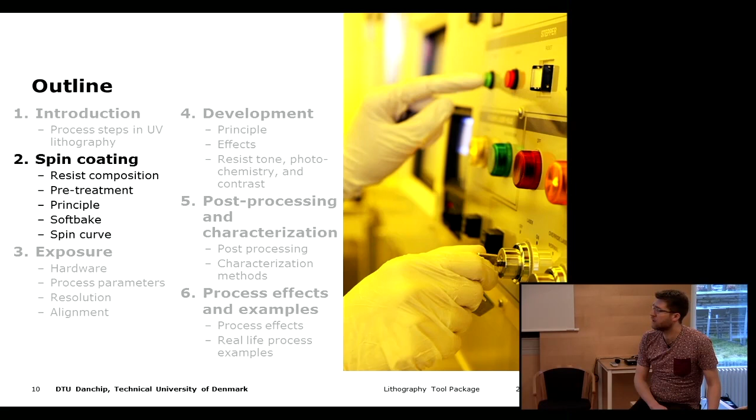So repeating again the spin coating process step-by-step, we want to go from our substrate to a substrate that has been coated with the resist film. And the way we do that is by taking the substrate here.

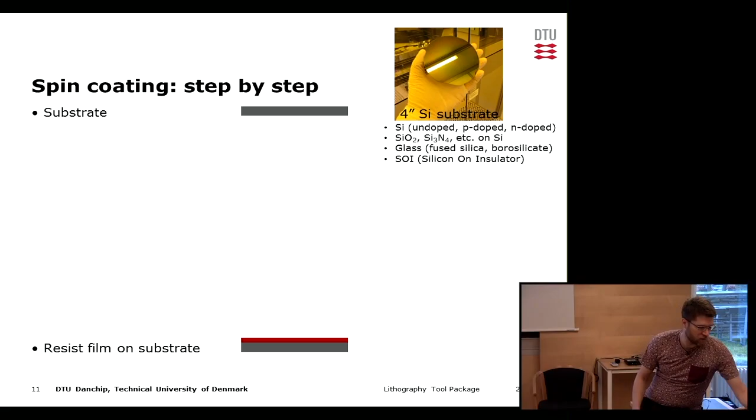Maybe I should actually send this around just in case you've never handled a substrate. I can just show you here. I have a box with some different wafers in, so that you can have a look. Should be some with resist and some with patterns on it as well.

So we start with the substrate, and then in most cases we need to do some kind of pre-treatment to the substrate before we start the coating process. We just want to make sure that the resist coats nicely and also that it adheres well to the substrate afterwards.

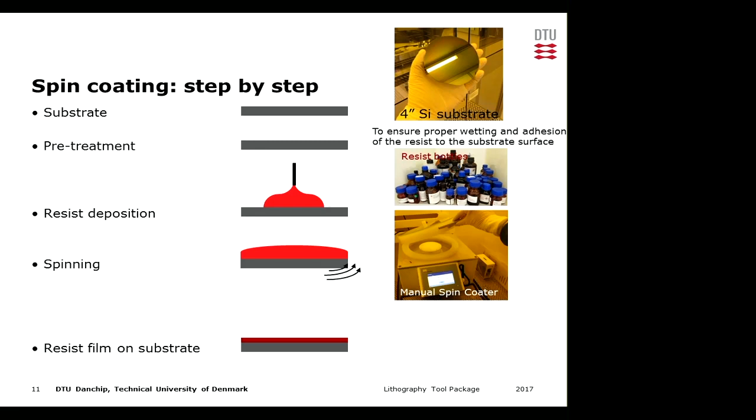And then there is deposition of the resist. So we pour some resist on top of the substrate. Then we rotate it to coat a very thin layer. And then after that, we bake it in order to get rid of the solvent in the resist. And then we are left with a dry film on the substrate. That's the idea.

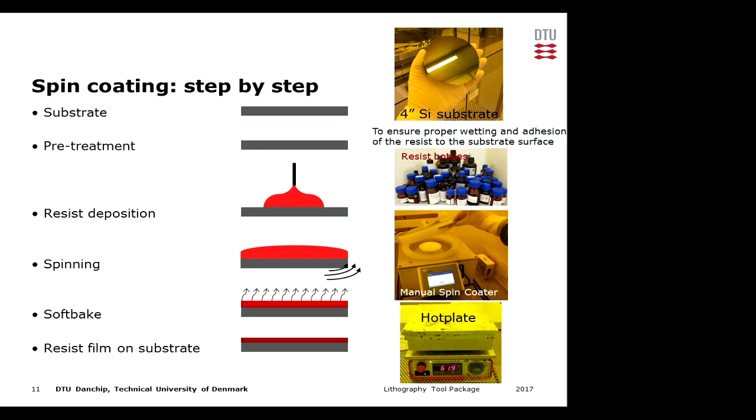So the pre-treatment before we start the coating can also be called priming or adhesion promotion. Basically what we want is to make sure that the resist flows nicely on the substrate surface, and that the resist sticks to the surface once the process is done. So we have some different types here for different substrates.

So for all the classic silicon industry ones, we use HMDS. This has a very long shelf life, so you can do it well in advance of the spin coating. Another thing we can do with the silicon is strip the native oxide of the silicon using BHF. But this has to be done immediately before spin coating, because the shelf life or lifetime of this treatment is only very short.

In some cases, HMDS is not really compatible with the resist. And then what we usually have to do is dehydrate the surface, just to make sure there's no moisture between the resist and the substrate. And this again has to be done immediately before the spin coating.

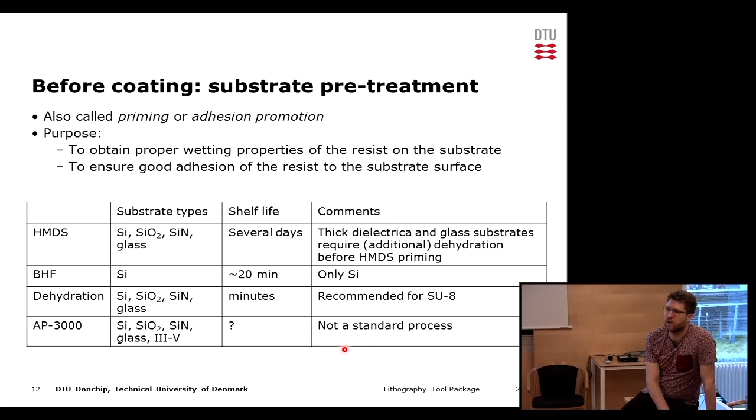So going into detail with this, the way we characterize the surface before spin coating is by the contact angle to water. What you can do to make sure the substrate is ready, or at least how we analyze or characterize the process, is by measuring the contact angle. And what we want is for the contact angle to water on the substrate to be similar to what it would be on top of the resist. This is typically in the order of 70 degrees. So that's what we are aiming for.

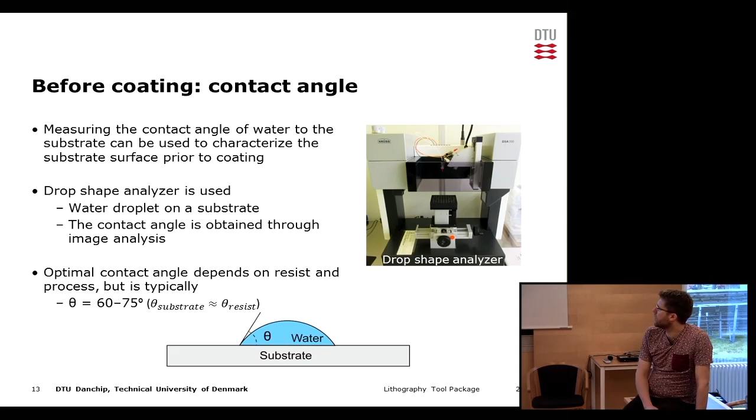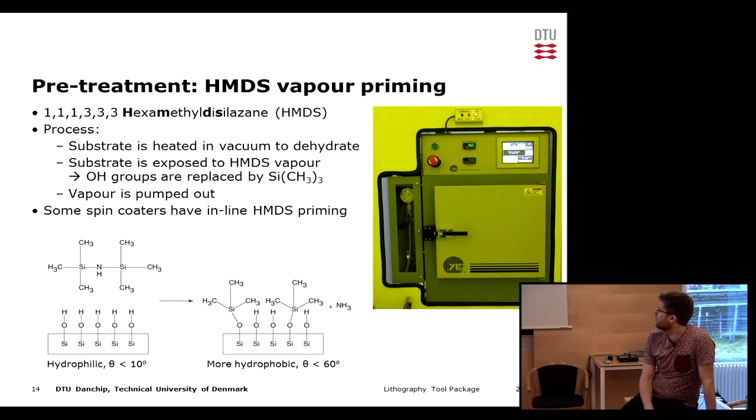So we have this silicon here, which bonds very nicely to the silicon surface, and then we have some polymer-like hydrocarbon end of the molecule there, which bonds very nicely to the polymer in the resist. So that's how that worked.

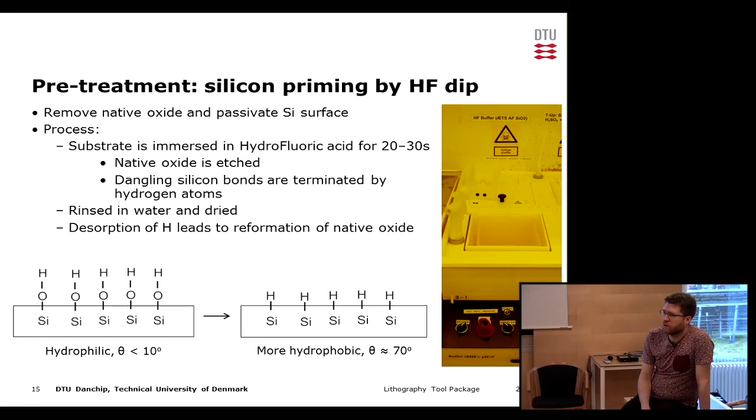Okay, but once we're happy with the pretreatment, we are ready to go on and actually coat the resist. I'm just going to talk a little bit about what the resist is made up of. It's made up of 3 components. The first one is a resin, so this is the polymer itself, and it's typically solid at room temperature.

This polymer resin is mixed with a photoactive component. This is something that we can add to the polymer, which will react to the UV light and bring about some kind of change in the resin. And this mixing is done in a solvent, which also makes the polymer fluid so that we can actually do the spin coating.

One of the things that we need for the spin coating to work, to give a specific thickness, is a specific viscosity. So the amount of solvent that we add enables us to coat the polymer at different thicknesses.

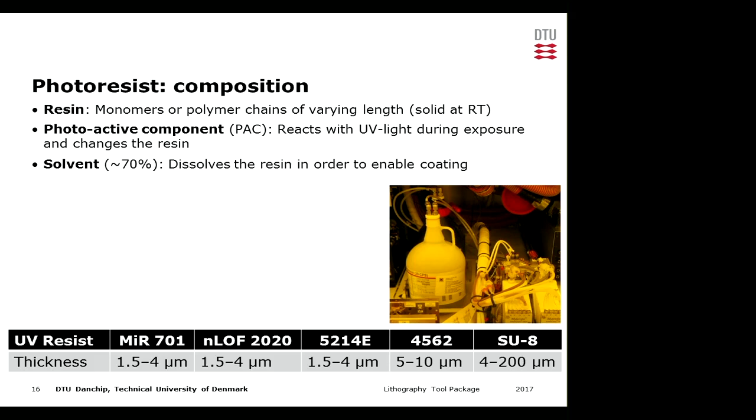Once we have a coated layer of resist on our substrate, this resist has some properties. The thermal stability is fairly good up to around 100 degrees. This is typically where the polymer will start to flow or to reflow, so that it changes the size or the profile of the resist structures. And if we go even higher, we can start to see damage of the resist and eventually burning.

The chemical resistance towards acid is generally good. This is one of the things that a lot of resists are made for, is for wet etching in acids. So we generally have a good resistance towards acid, but the resistance towards base solutions will be poor, because the typical developer is a base. And also towards solvents will generally be bad, because it basically dissolves the polymer again and takes it away.

So you can see here down in the bottom a list of the UV resists that we have available in the clean room. And these are the ones that we sort of have established standard processes for.

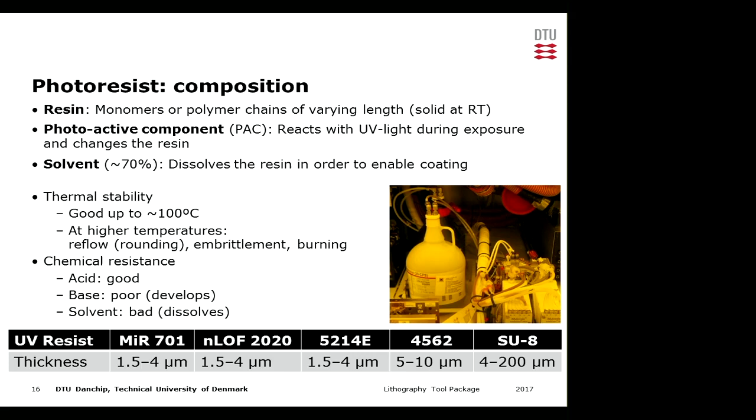Okay, so we go into the basic principle of spin coating. The wafer is held by vacuum on a motorized chuck, and this chuck sits on the spindle of a motor, so we are able to rotate it.

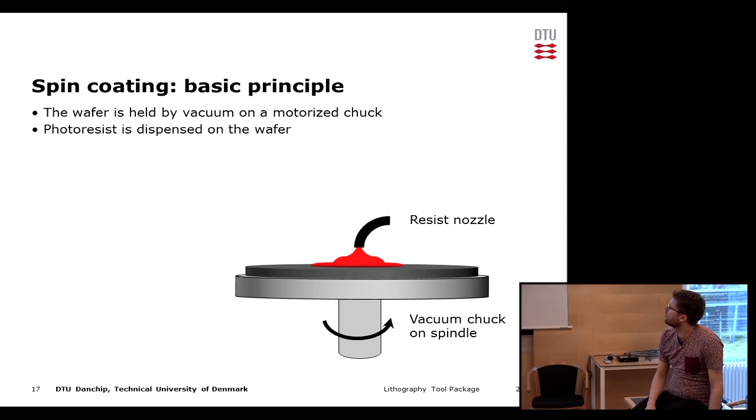Then the first step is to dispense some photoresist on top of the wafer. After that, we rotate the sample to spread the photoresist evenly across the surface. Typically the speeds are in thousands of rounds per minute, and this basically means that most of the resist that we put on top is actually thrown off. We are left with only a very thin and hopefully uniform layer on the wafer.

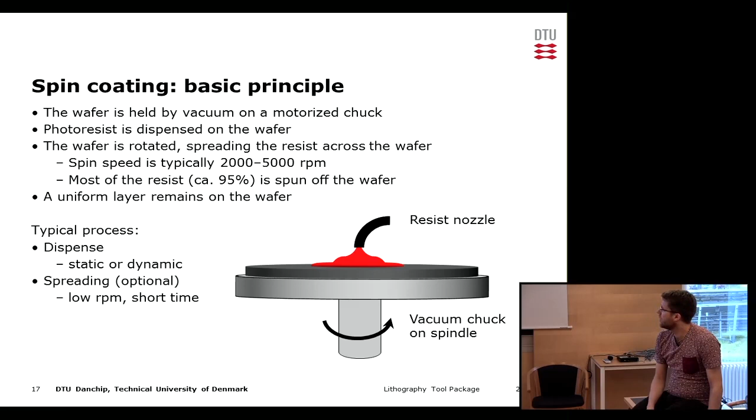A typical process has some steps like dispense. This can be done while the substrate is rotating or before it starts rotating. So static is when it doesn't rotate, and dynamic dispense is when the substrate is rotating. There is sometimes we need a spreading step, which is something that typically needs to be there if we have a thick resist. So a high viscosity resist typically needs a low speed step in order to spread it evenly across the surface before we go to the high speed.

So this is the spin-off step, high speed, typically around half a minute or 1 minute. And this is where the thickness is defined.

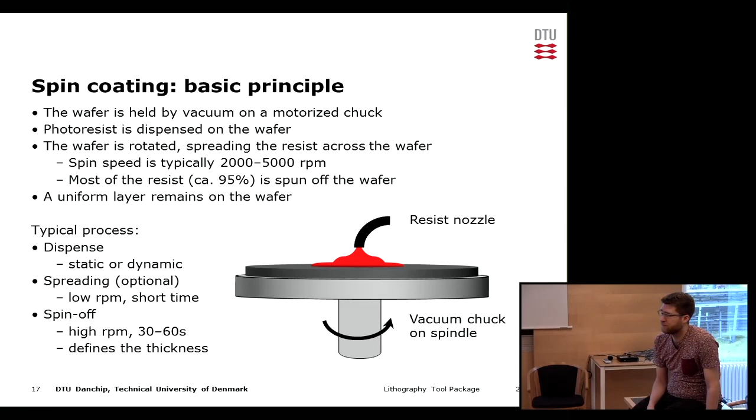So I just want to show you a video of this coating process.

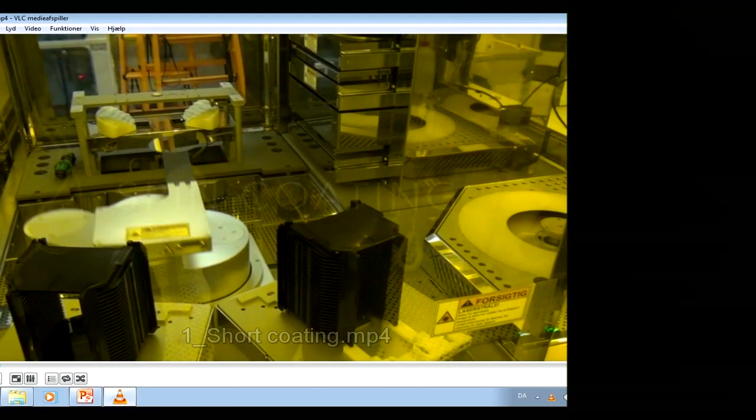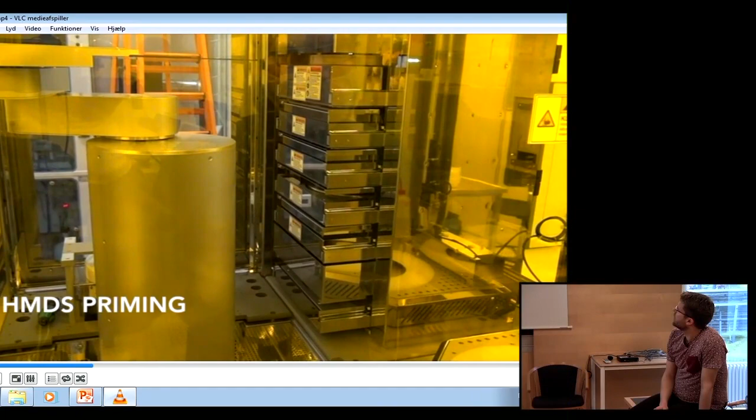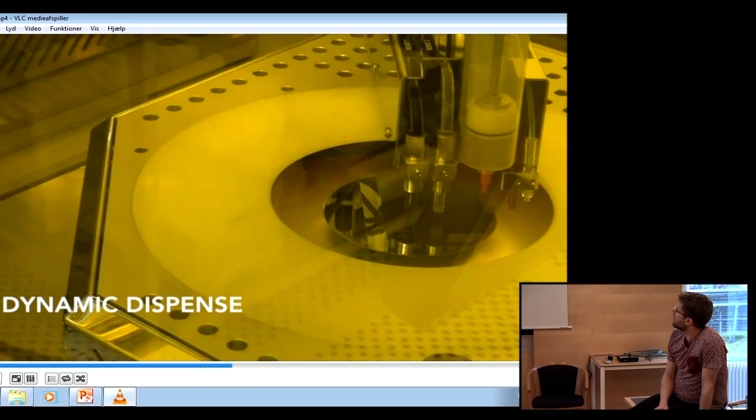So this is one of the automatic ones. The first thing that happens is that we get the priming in a special oven. And then the spin coating starts. You can see it starts rotating now before the dispense, so then we get a nice flow across the surface. And you can hear the acceleration towards the final speed.

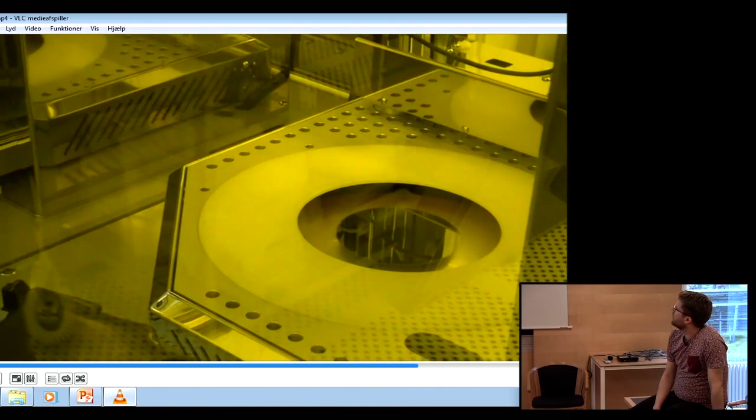And then there's the baking step at the end.

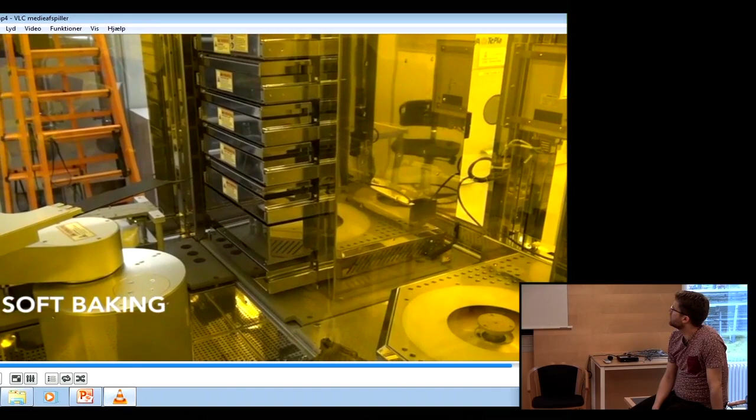You can also hear the clean room ambient, and you can also see that everything is yellow. This is because we need to filter out all the blue components of the light in order not to activate the resist by the light ambient around us. We only want to expose the resist to light when we go to the actual exposure step. So all the lithography areas in the clean room will have a yellow light.

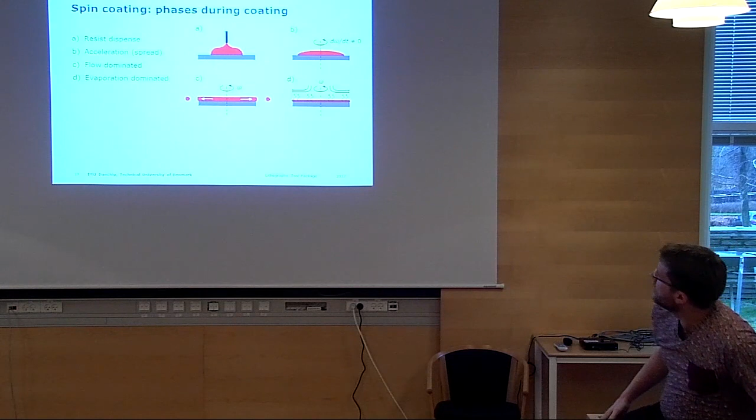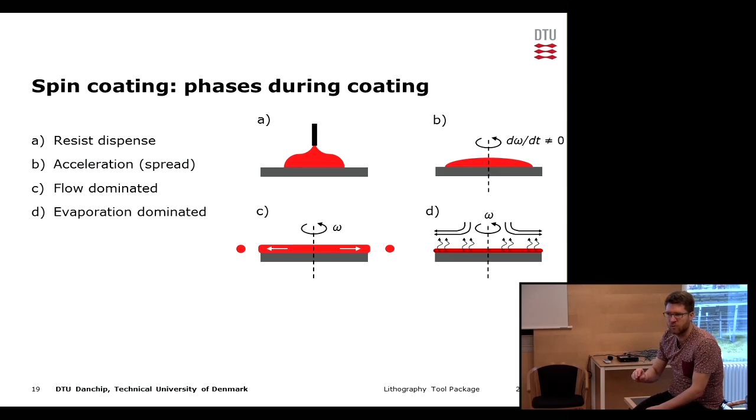During the spin coating, there are different phases. First, there's the resist dispense, and then the spreading of the resist as the wafer starts to accelerate. During the actual spin-off, there are a couple of different phases. There is the first one which is dominated by the flow of resist actually leaving the surface. Then at the end, when we have a uniform layer and no more flow, the solvent in the resist will start to evaporate, and you get a thickness variation that happens due to this evaporation of the solvent.

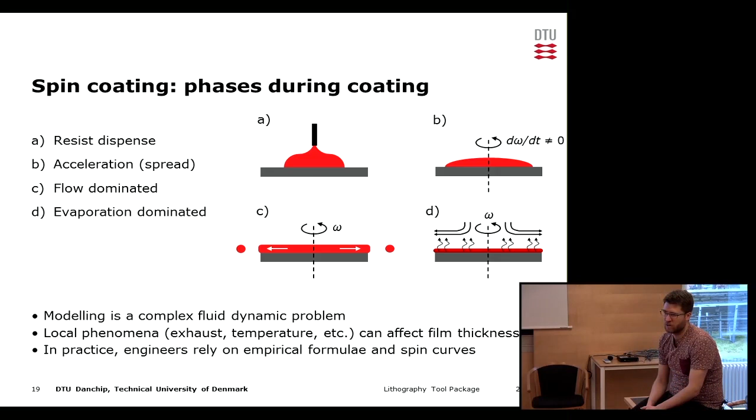So this is a complex thing to model, which means it's not easy to predict what thickness you'll get just by looking at the spin speed and the viscosity, because there is a lot of local phenomena like the exhaust in and around the spin coater and what temperature you are at, which affect the film thickness. Generally, as engineers we rely on empirical measurements. We typically do a spin curve where we just test what thickness we get at different spin speeds and use that to help us get the desired film thickness.

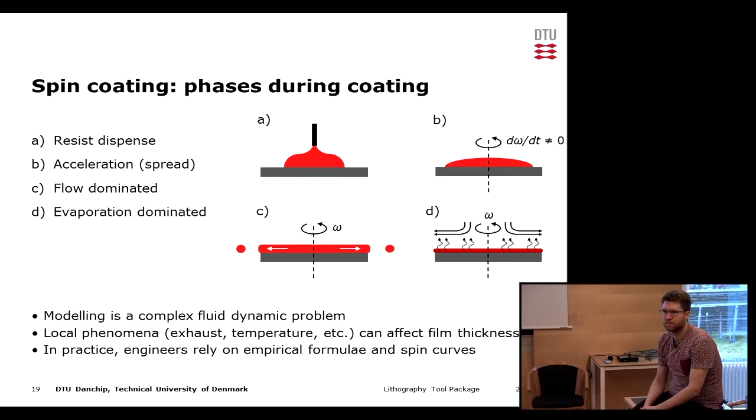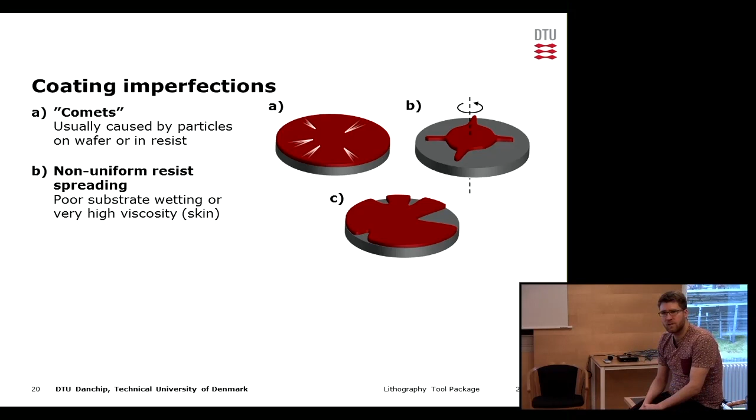Another thing we might see during the spin coating is that the resist doesn't spread nicely across the surface. This is typical for a high viscosity resist, where there is a low solvent content, which means that if you get some evaporation of the solvent on the surface of the dispensed resist sitting there, it can create like a skin on top, which can be difficult to break, and you can sometimes see that it breaks off only in one direction and leaves part of the substrate uncoated.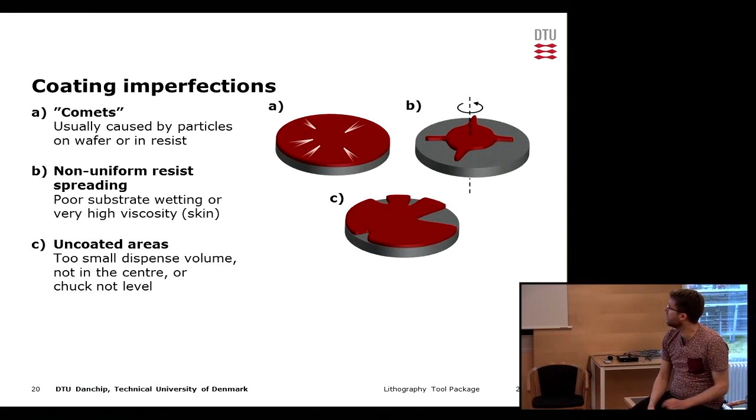We can also see uncoated areas like in the last picture there. This is typically if there is not enough resist to actually uniformly coat the surface. Or another thing that can do this is that if the instrument or the chuck is not level, then you can get the resist flowing off to one side, and there's not enough left to coat the other side of the substrate.

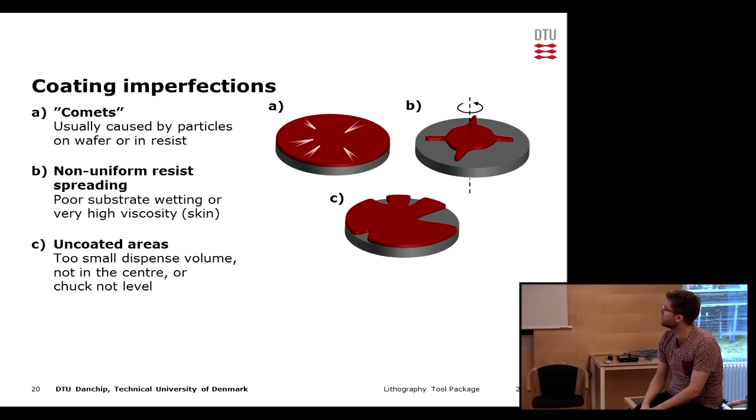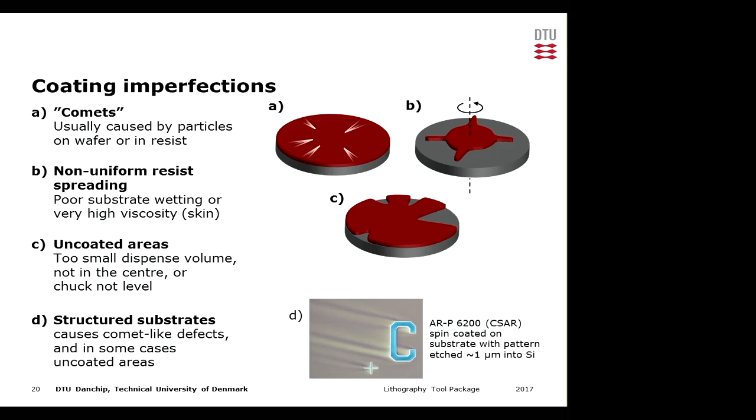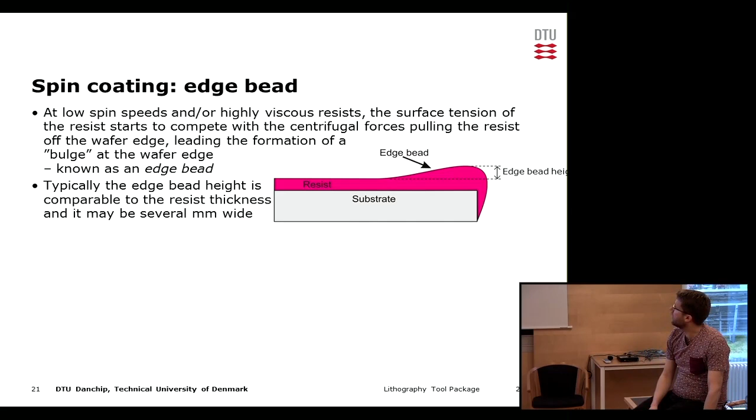And of course, it can flow out and spread out and actually cover several millimeters of the edge of the sample. It's not something that we see as a problem for the standard UV resists. There's something with the viscosity range compared to what spin speeds you are coating at, which helps. And on circular wafers, we also tend to see less of this.

There are things that you can do to the edge bead. It typically involves actually physically removing it afterwards with some solvent. It can be done manually or sometimes also automatically.

And there are some cases where you can do things to reduce it in the way the spin process is performed, either by playing around with the spin time and also the accelerations, or by introducing some extra hardware on the spin coater that can help in this case.

This is something that can typically help if you are coating a square sample. Then it's kind of like a lid that you put on top, which helps prevent a lot of turbulent flow around the sample, and also helps keep all the solvent in there so that the viscosity doesn't change during the spin coating process.

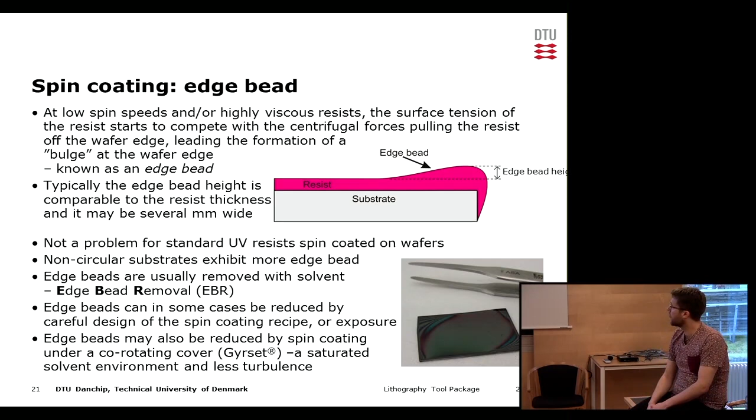After the coating, we need to do a soft bake. So this is the baking process that we do after the coating. It's called soft bake. I think it's kind of like a historic industry term for this process.

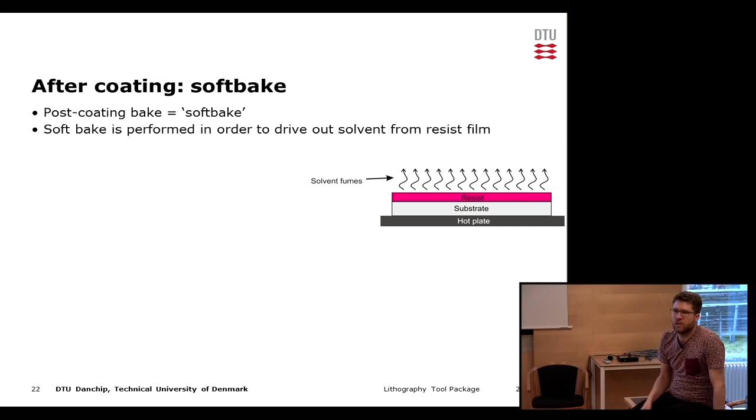So the reason why we do it is that we want to get rid of all the solvent in the resist film, because immediately after coating the resist is still wet, so it's still liquid, and we want it to be a solid film before we go on. So we want to increase the mechanical stability of the resist, and we want to prevent it from sticking to the mask when we go to the next step in the exposure process.

It's typically around 90 degrees, and it's 1 or 2 minutes is a typical process. Of course, if you have a thick resist, it might be several minutes, and in some cases even several hours of baking after the coating.

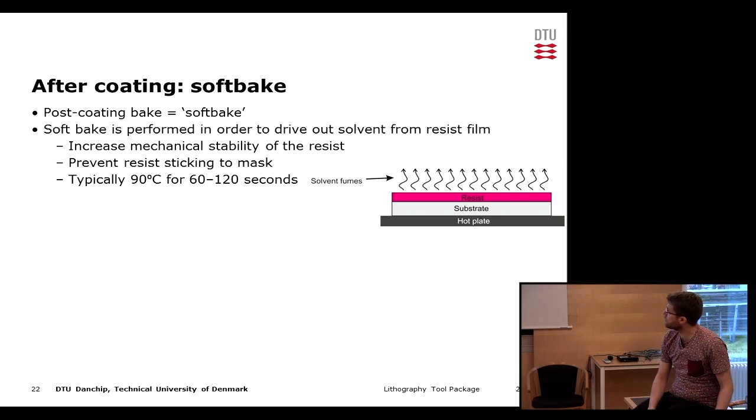So it's typically performed on a hot plate, and in our automatic equipment, we can actually choose between contact baking or proximity baking. So either we can put the wafer in intimate contact with the hot plate, and sometimes even hold it down with a vacuum.

Or in the other case, we can keep the wafer at a distance from the hot plate. This can have some benefits in terms of not making the hot plate dirty, and that also means that we won't get resist on the backside of our own substrate when we do the proximity baking.

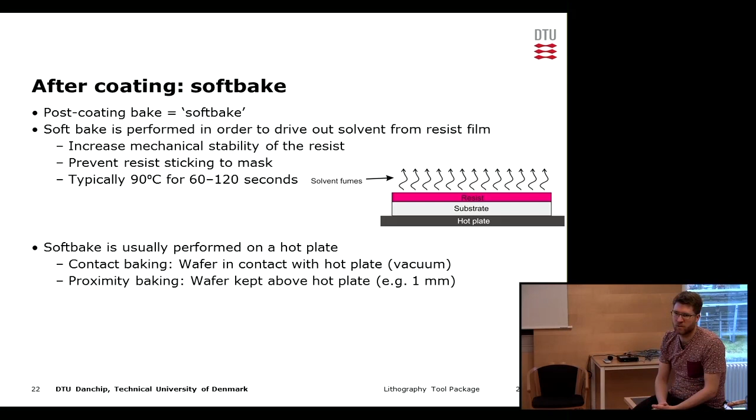If we increase the soft bake temperature, we will typically see that we get a thinner film because we get more evaporation of solvent.

But in cases where we increase the temperature too much, we will see that the photosensitivity of the resist will decrease, because we can get some thermal activation of the photoactive component. At very high temperatures—these are temperatures where 120 degrees is something that is typical for a UV resist—we actually have resists for the stepper, and also for the E-beam, where we bake at around 200 degrees instead.

So this is typical for a UV process. What can happen if you go to high temperatures is that the resist actually starts bonding to itself, and that means you lose completely the photosensitivity, because it will not be developed at all in the developer.

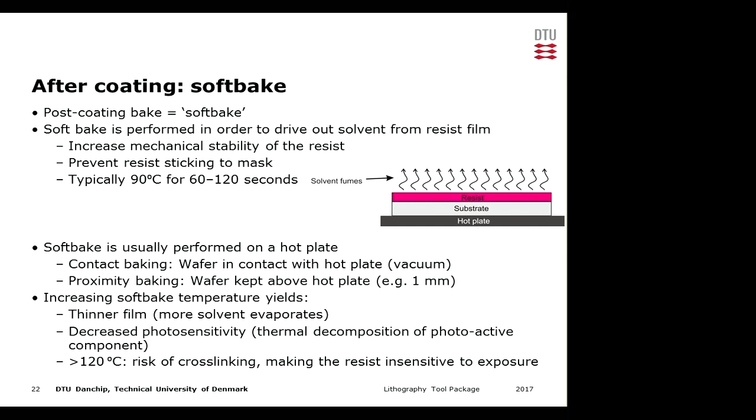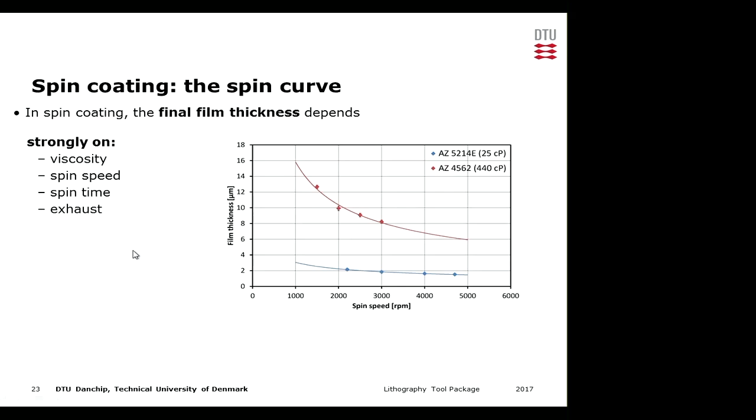Okay, so here's an example of a spin curve that we have made in the clean room. We have two different curves here for two different kinds of resist. One has a higher viscosity that gives a higher thickness, and the other one is a low one, which gives a low thickness. So you can see here, as a function of the spin speed, the different thicknesses.

The film thickness that we get in the end depends quite strongly on the viscosity, the spin speed, and the spin time. It can also depend quite a lot on the exhaust specific to the machine that we're using. A high exhaust will typically take away more solvent, which means that the viscosity is increased, and that gives a thicker film in the end.

It depends less on how we do with spreading steps and what kind of accelerations we're using in the process. Provided that there is enough to begin with, it doesn't depend on how much resist is dispensed in the beginning. So when you do a manual spin coating, you can easily just deposit something by eye to be enough, and it will work every time and give you the same thickness. Even though you may put 2 milliliters one day and 3 the next, it will not give you any difference.

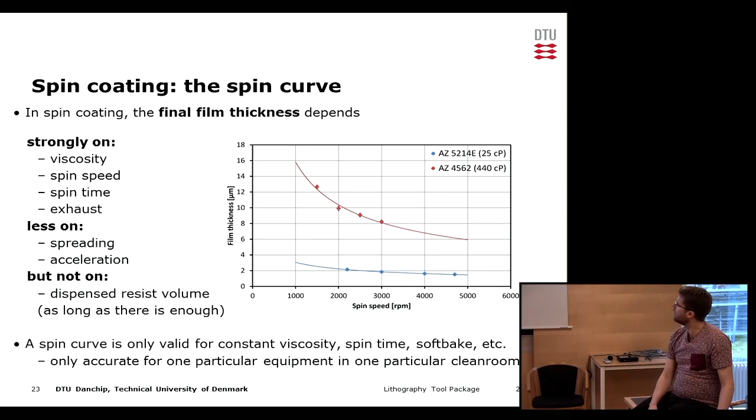So a spin curve like this one is only valid for a specific resist, basically, in a specific machine inside a specific clean room, because it depends on viscosity and spin time, and also how it's baked afterwards. So if you find a spin curve from somewhere else on the internet, or get it from a supplier of the resist, you cannot really expect to reproduce this 100% when you go in the clean room. You typically still need to adjust the spin speed a little bit to get the desired thickness.

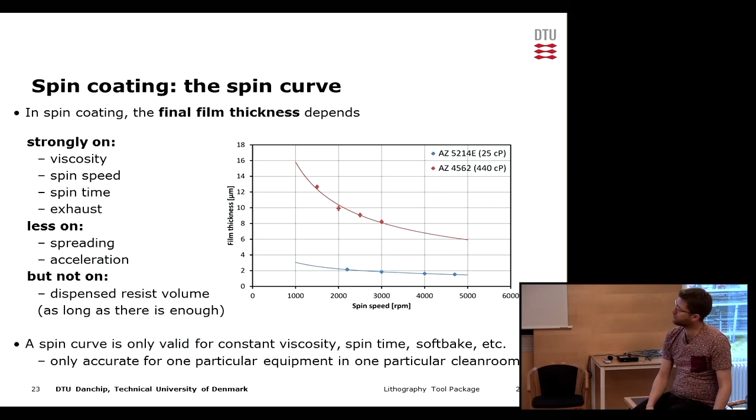Such a spin curve has been modeled. This is purely empirical stuff - you take the data and you try to fit a curve to it. But it typically turns out something like this: we have the film thickness here, which is proportional to something that has to do with the amount of solids in the resist and the viscosity of the resist, and then inversely proportional to the spin speed used in the spin coating process.

So the K is the calibration constant, and we typically combine it with all the factors that relate to the resist property, so that we get something which is specific. We get a calibration constant which is specific to the resist on our spin coater, and using our sort of process with the spin time and also the soft bake afterwards.

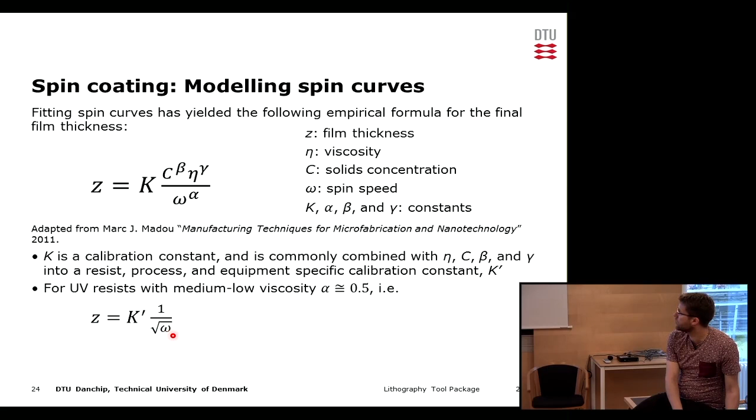And for UV resists, the alpha is typically around 1/2, which means that we can reduce the thickness dependence to this one here. So you can see that we have something where the thickness is inversely proportional to the square root of the spin speed.

And if you have a very thick resist, this alpha exponent typically approaches 1 - so this is if you're using a thick SU8, for instance. And if you have a very thin resist, like what is typically used for E-beam and also for the stepper processes, the exponent can be lower than 0.5.

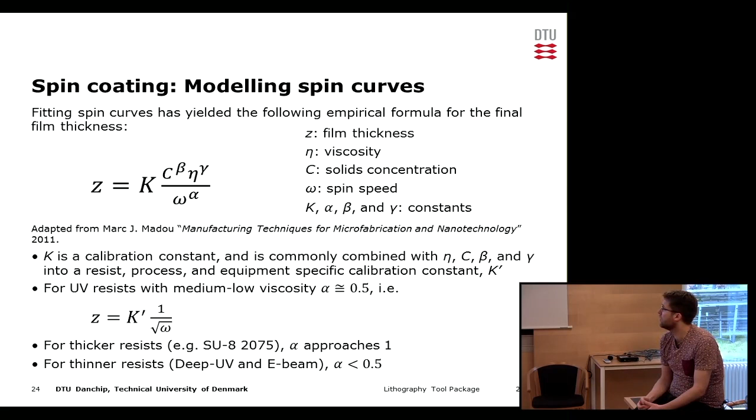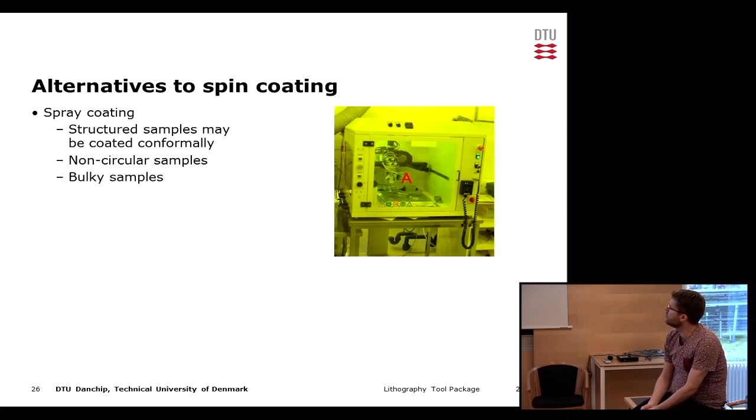There are some alternatives to spin coating out there. The most useful one is probably spray coating. So this is where instead of rotating the sample and coating the uniform layer like that, we basically turn the resist into a mist and spray it onto the surface. This has the possibility of being able to actually conformally coat even structured substrates. So even though you have large variations, large topography on top of your substrate, it is possible to coat it uniformly so that you get the same thickness everywhere.

It's tricky to optimize the process, and it tends to have to be optimized for each sample. But another thing which it is very good for is the non-circular samples, because the spin coating process generally works best for samples that are circularly symmetric. And also if you have a very bulky sample, something which is heavy, that doesn't really match with a high-speed rotation, this is also a good idea.

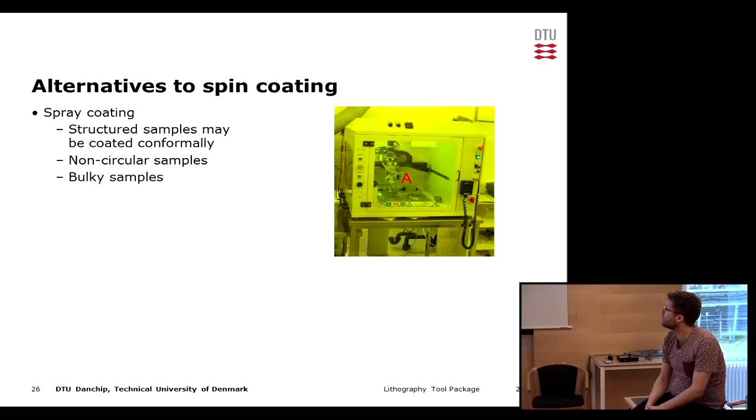Some more exotic coating methods are mentioned here, like dip coating, where you basically have a vessel of resist and you take your sample into it and pull it out, and then you can get a coating. In this case, you would get the coating on both sides. One of the things there is that the final thickness actually depends on how fast you pull it from the bath of resist, so this is something that can be tricky to reproduce.

And there's other things here, one of them being that you can do a dry film lamination. So in some cases you can get the resist as a film from the supplier, and then you sort of roll it onto your surface. The ones that we have here at Danchip is that we have a spray coating equipment, and the dry film roll lamination would also be possible to do here, but the rest of them require equipment that we don't have available.